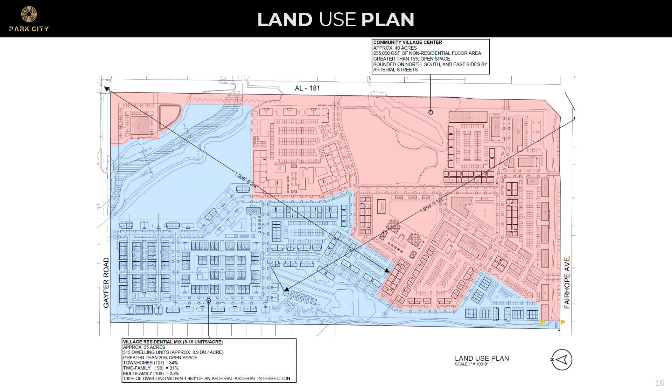The village residential mix in blue, we're calling all of this village residential mix 8 to 10. We've got approximately 35 acres here, about 313 dwelling units, and we're in excess of 20% open space. You'll see a listing of townhomes making up 34% of the product mix on this site, duplex making up 31%, and multifamily making up another 35%. All of these dwelling units would be within 1,980 feet of an arterial intersection, which is what these dimension strings overlaid on top of the diagram are meant to represent.

Some open space and streetscape diagrams. Niket is a big proponent of new urbanism as a planning practice, and much of what's in these village districts, which Hunter is also a proponent of, exists in that framework—parallel park streets, street trees, a pedestrian environment, and small blocks to make it permeable and walkable.

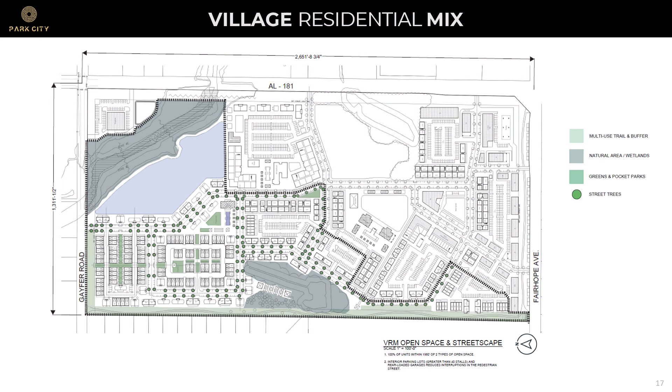So we're trying to represent that in these diagrams, showing street trees on the primary circulation around the village residential. You'll see open space along the northern border, which is a factor of a construction setback on the property, and along the western border about a 45-foot setback that is a multi-use trail and greenway running the entirety of that side. We're turning a bunch of the buildings that run down that side of the property toward that trail so they front onto it, and we're trying to amenitize that trail and green space as much as we can in the planning. Here's a little idea about not necessarily density, but height.

I know there's a big sensitivity, which we talked with Hunter about early on, regarding this western border and the single-family residential that's our neighbor. So we've tried to step everything down to 1- and 2-story building massings along that border to be a good neighbor, and pushed the bigger, taller buildings interior to the site, mostly along Main Street and surrounding our community space, to frame this outdoor room, as we would call it.

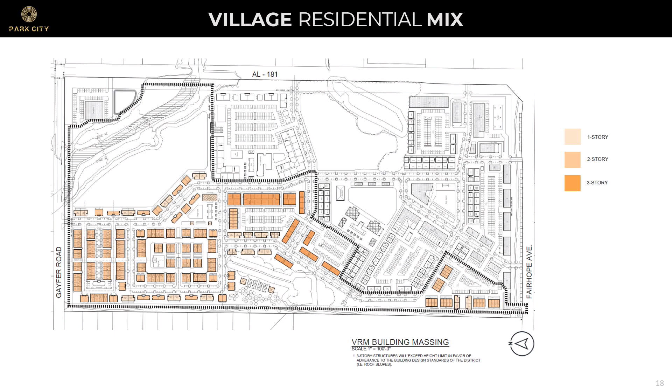In large part here we've got a series of pocket parks, the beer garden, the event lawn, some natural area—this pond and natural area in the middle of the site along 181 already exists. I think part of it is classified as a wetland; it looks like a man-made pond, but I think it's still classified as a wetland. So we're trying to leave all of this as natural as possible, and using some of the adjacent area as a wet pond, making this an extension of the community space we're developing on the interior of the site.

Again, the same kind of street section here—we're looking at street trees and parallel parking on all of these streets, trying to make this as permeable and pedestrian friendly as we can.

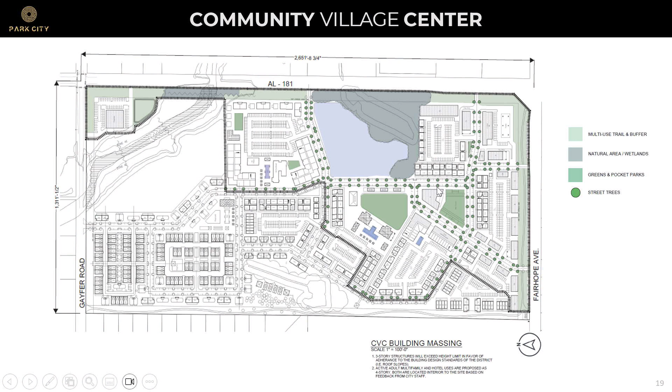Another height diagram for the commercial component. This lines up very similarly: you've got low scale, 1- and 2-story buildings along the primary street frontages, with taller and denser buildings pushing into the interior, most of which are 3-story. The hotel here is being proposed as a 4-story element, and the active adult multifamily buildings here are proposed as 4 stories.

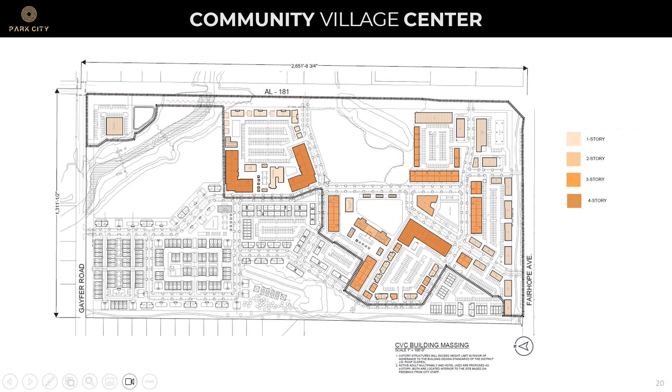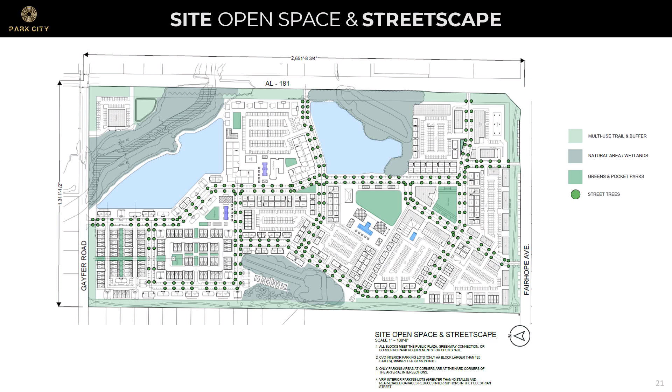This is just the other two diagrams combined, so you can see how the street network is covered with shade and trees to make it walkable, and also the extent of the open space and green space that's on the site.

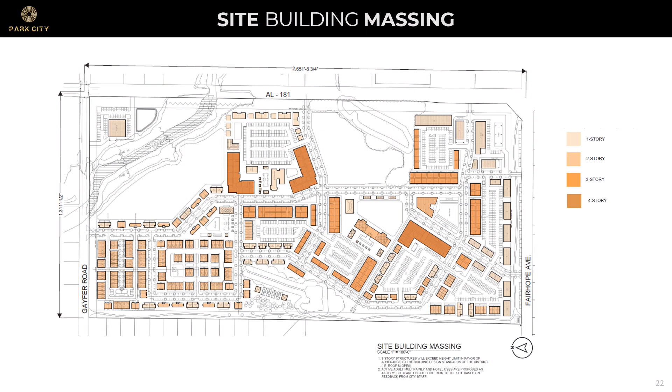Similar thing with this, just to try and show the height and the mass of the buildings all being pushed to the interior of the site, which was based on some early feedback and conversations we had with Hunter along the way.

Then we get to architectural character, and I think we're trying to take cues from the existing fabric of Fairhope and spin it forward a little bit, doing a modern interpretation of those. You'll see darker tones and color palettes, but they've still got traditional inspiration in the building forms, the timbering, and the front porches. So that's what we're trying to key in on: the color tones and the building forms.

We know that the front porch and some of this streetscape, and how the buildings address the street, are also controlled in the village districts. So we're taking cues from that and how we're setting these up as well.

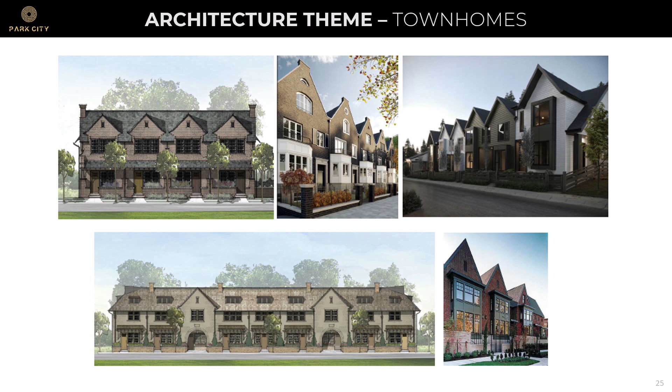We're also trying to represent all of the different product types that are actually on the plan. We've shown here some row houses or townhomes, and you'll see higher contrast in the upper right and center right, but strong traditional building forms and interpretations that are maybe a little more modern or a little more eclectic.

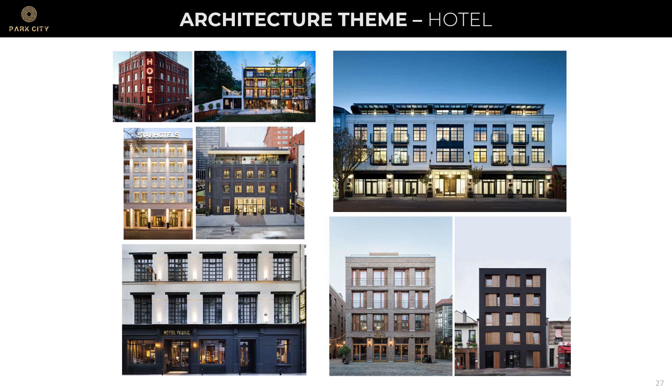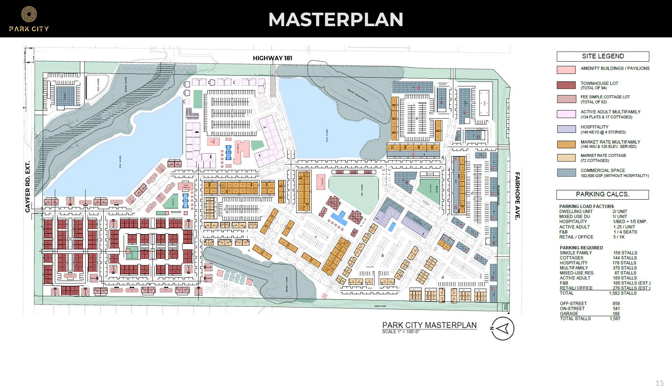To consolidate the consensus, I think the perimeter, making it more engaging and inviting - I like the idea you've come up with recently about how to draw people in rather than just seeing a big strip. If you're driving down 98, our big buffer is nice, but you're not looking at the side of Subway and Piggly Wiggly. We have that big buffer, but it's not engaging. We're not using that.

Green space - so how can we, especially what I see that's not been discussed, is on the west side, what's going to be on this side of the property and what are we using it for? Everything else is going to be cars and pedestrians, but this is going to back up to a neighborhood.

Yeah, there is some significant landscaping along a lot of that border. The idea is to try and save all the mature landscaping that rides down that border and let this multi-use trail weave in and out of it, but leave it as natural as we can. So the fact that we're facing some buildings onto that, we thought it's just like having a public green in front of your house, that's what you're looking out to. And then you can see the parallel park street that comes down and touches that greenway close to where the main town center activity is.